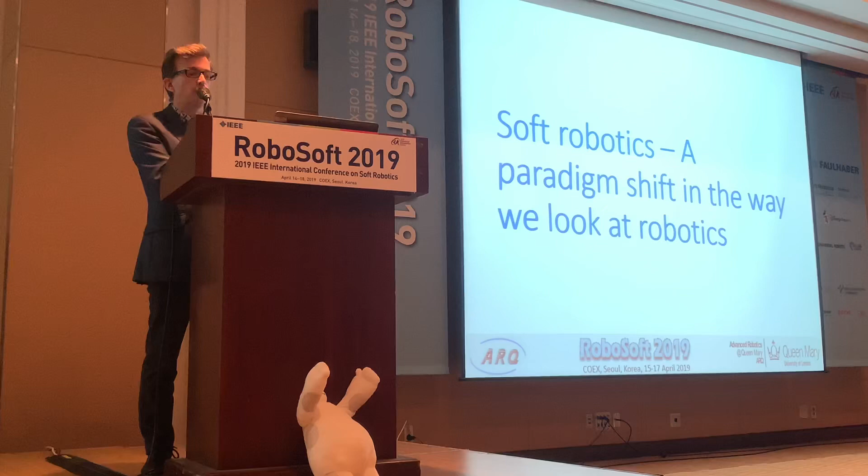Today I have been asked to look at how perception or sensing can be linked with this kind of new area of soft robotics. I want to give an overview, but it's difficult because at this conference I have seen so many sensing approaches. I suppose everyone here agrees that soft robotics represents a paradigm shift, and it really influences our way of looking at robotics.

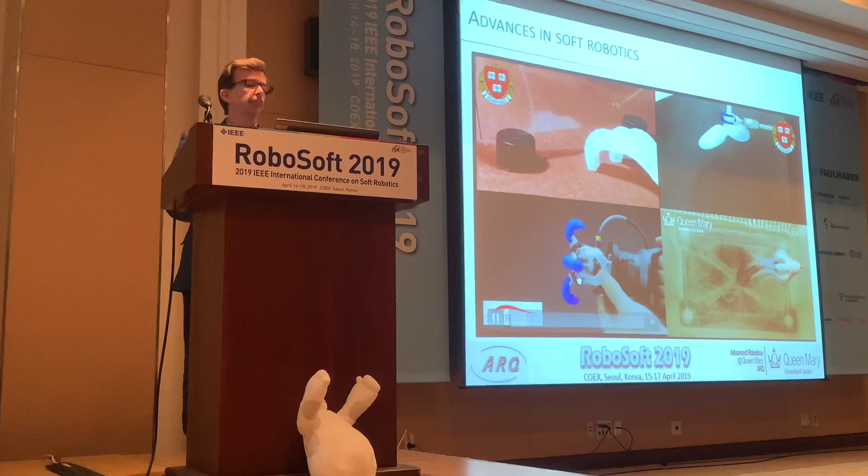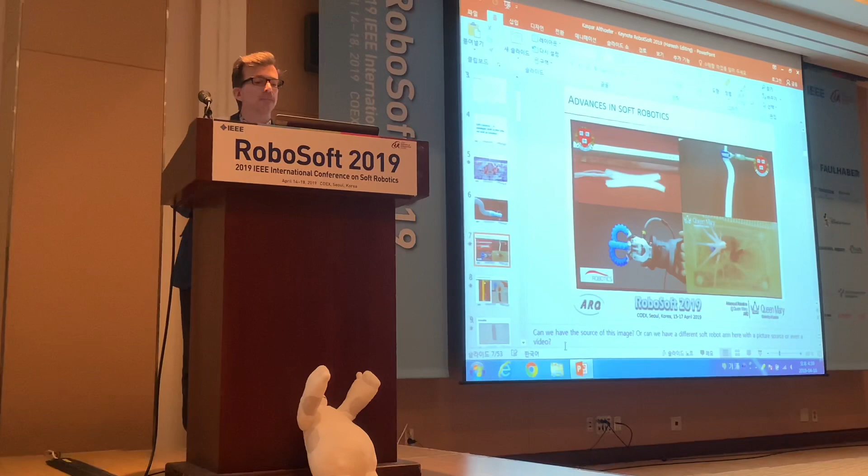So now the sound is in the way. I interrupted. I was told that's the only way to switch off the sound. Let's do that again. Okay, that's better.

Different systems are developing. We can see here examples from Harvard, from our place, even from a company, Soft Robotics, developing these systems. This shows to me there's a lot of interest in the area, and it's moving forward.

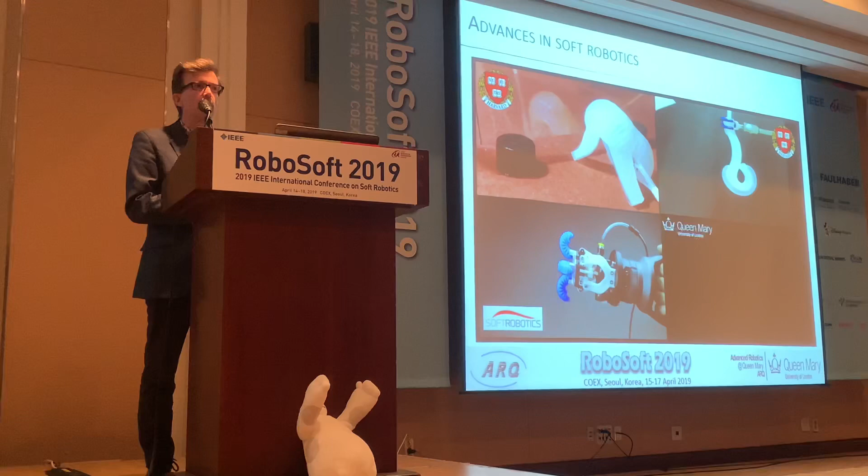However, these devices are so far very much at the beginning, and there is lots of development still needed. What I see is systems that show it works, that show we can create devices that can move. But I think we need to step a bit further and see whether we can equip those devices with the right perception so that they can also carry out meaningful tasks.

Here is another example, and I'm contradicting myself a bit. This was created in collaboration with colleagues from Poland, a research organization called PIAP. Here we have a soft robotic device made of silicone rubber material with chambers inside that can be inflated, and we have a gripper attached at the end that can carry out a task.

The interesting thing is there are no sensors in there, and still the system was running for many days without any problem. Obviously it was programmed to start with, but once programmed, it had the capability to generalize about its task and was able to pick up the ball even though it was not always arriving at the same point. But we need to see whether we can move forward to some more intelligent and autonomous systems, and those need something to perceive the environment so that they can carry out tasks.

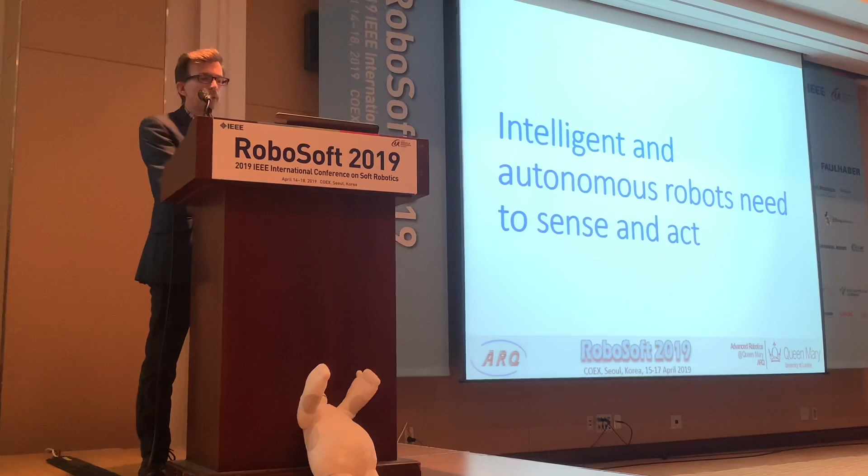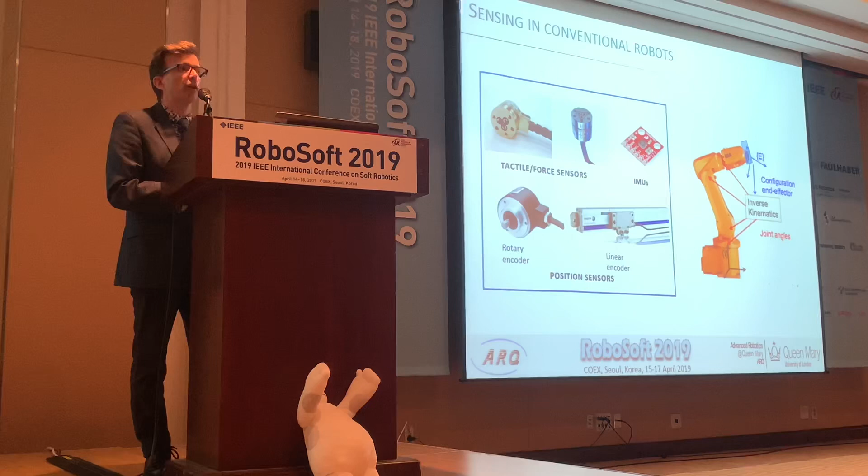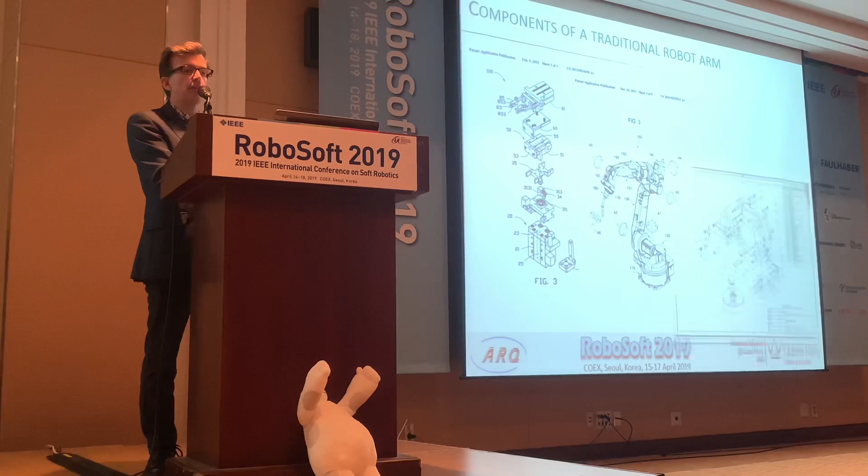So where have we been beforehand? Here is an example of a robotic manipulator, and we can see on the left-hand side the kind of sensors we're all used to, and they are all made of rigid components. It is very easy to equip a system that is already made of very rigid components, as we can see here, with those rigid type of sensors. You just screw them on and then off you go. However...

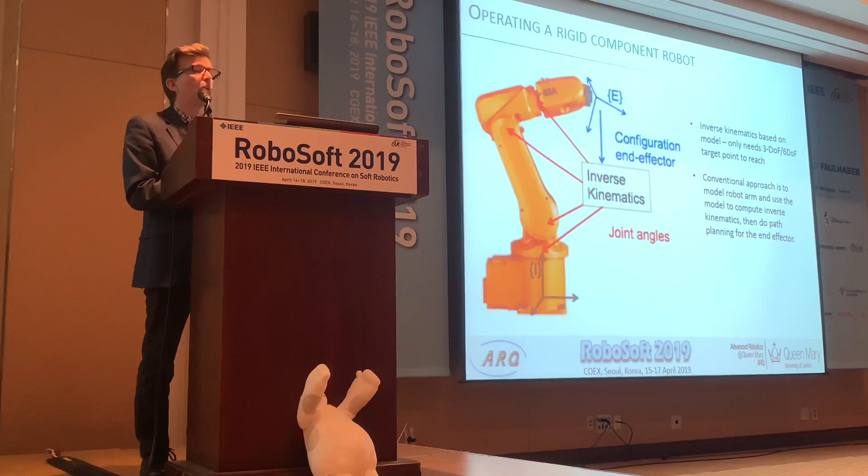The challenge will come if you look at the soft robotic systems. The approach taken so far in rigid component robots is to create an inverse kinematics model, and then you only need to specify points in space, and the rest is just a path planning problem. That is very straightforward, and here we can see it in a summary: we sense the environment, we do some calculation, and then we send commands to the actuators, and in most cases, if we have a rigid component robot, we will reach our target.

And I think that is neglected in rigid component robotics. So the models sometimes fail, and so maybe there is also for rigid component robotics a possibility to embrace that. Although on the other hand, we might think a big KUKA robot arm suddenly moving around in space to measure it might not be the best idea.

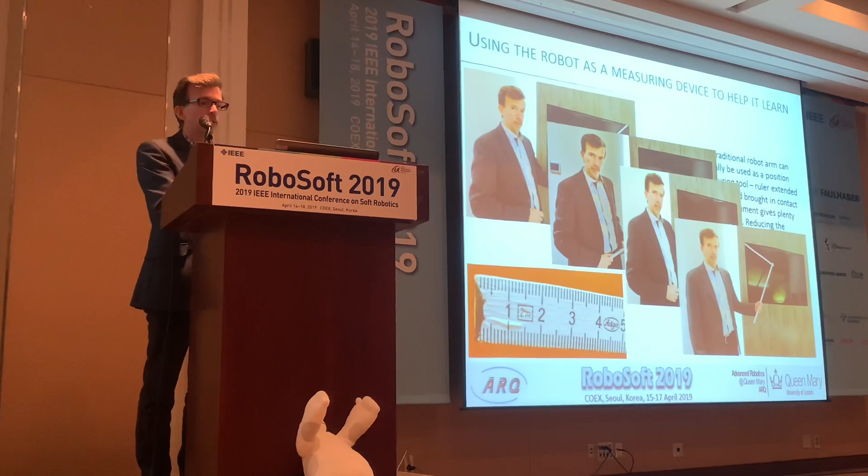However, I see there's a lot of potential for soft robotics. And as Daniela Rus also said at the end of her lecture, active exploration using sensors built into the soft robotic devices to understand the environment.

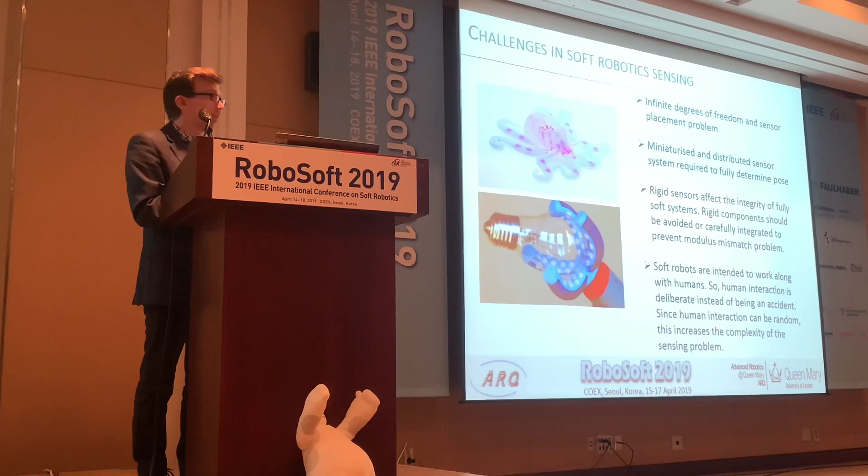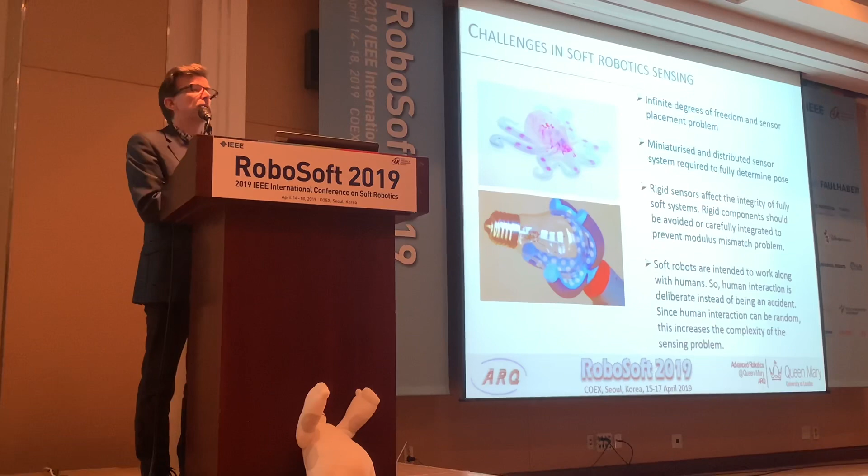However, what can we do now? If we have a soft robot, there are quite a number of challenges, because we have these flexible devices with their infinite degrees of freedom, and we have also quite a lot of sensor placement problems. We have seen the traditional sensors are not really made for soft robotics. We need to think about miniaturization. We have to distribute these sensors if we want to determine, for example, the pose of a soft robot. The rigid sensor should not impact too much on our soft robot.

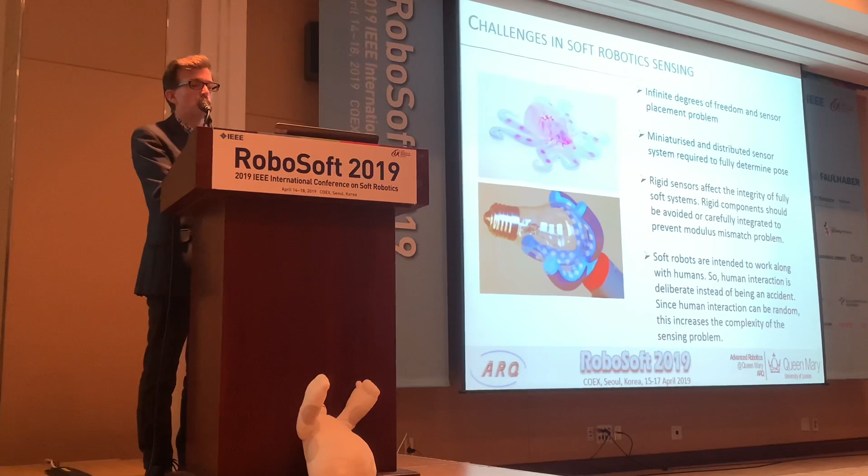And the last point, I think, is also becoming more and more important. I think there is more and more also an interest in bringing robots close to humans. And for this human-robot interaction, I think soft robots are ideal. So here is really an area we can move into, and these challenges have to be overcome to make meaningful robots to operate in complex and difficult environments.

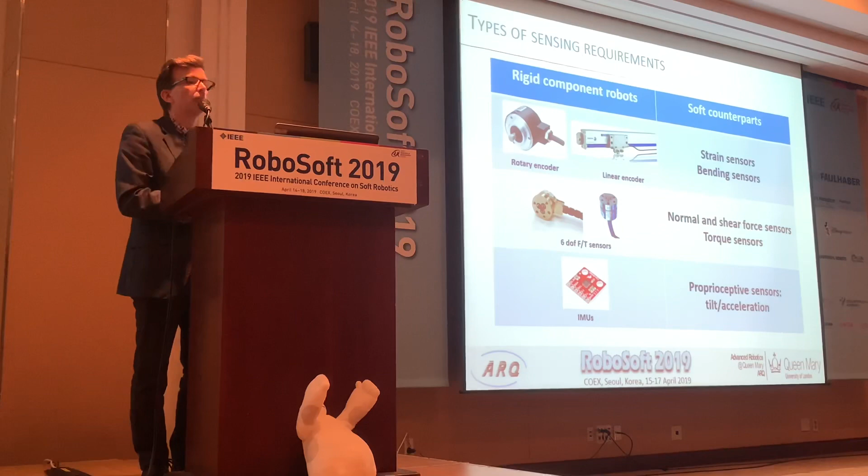So if you look at the different sensing requirements, on the one hand we have the rigid component robots and the sensors used in that area, and on the other hand we have the soft counterparts. So we are talking about strain sensors, bending sensors, torque sensors that have to be integrated, but also proprioceptive sensors that could be built into our soft robots.

So I tried very much to classify it a bit, but I think I failed miserably. So I have here an overview. Well, I think I'm missing quite a lot. I can only repeat - I saw many sensing technologies, sensing approaches presented during the conference, and there's definitely more. And if I don't mention yours, your work is also fantastic.

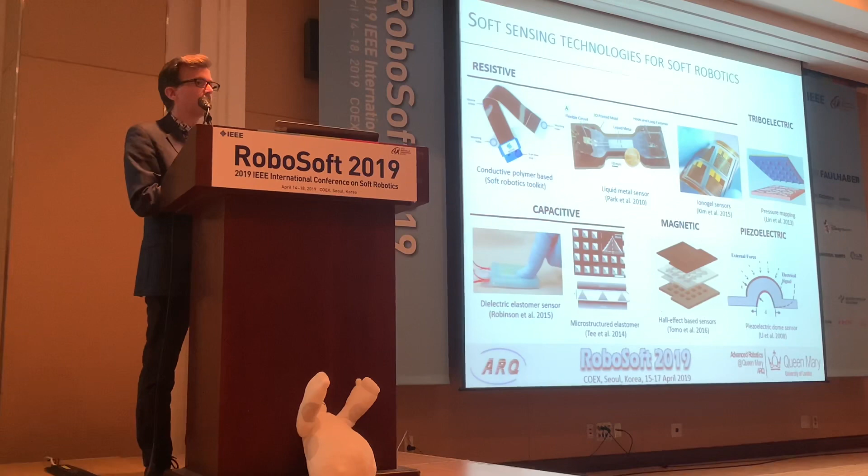Anyway, so we have resistive systems, flexible, stretchable devices that can be integrated without impacting too much on the softness of our robot. We have triboelectric systems. Capacitive is an area that has developed quite a bit. I've seen also magnetic systems and piezoelectric.

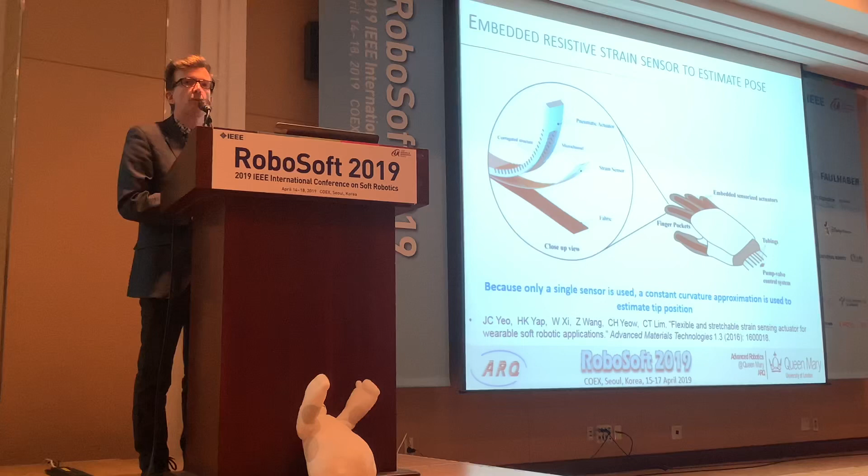So I'll go through some examples. We have embedded resistive strain sensors. These can be used to estimate pose. Here's an example by Yeo and others. We can see a flexible strain sensor embedded into the structure, and in this particular case it's just a single sensor signal that we get back. So we need some kind of model to relate the output to the movement of our robotic finger in this case.

I also would like to mention Oliver's work, Oliver Brock. He has already talked about it yesterday. So again, trying to come up with clever ideas on sensing information about the robotic device, this soft device, without impacting on this softness and this dexterity that is so inherent with them. So here we have a microphone and a sound generator integrated.

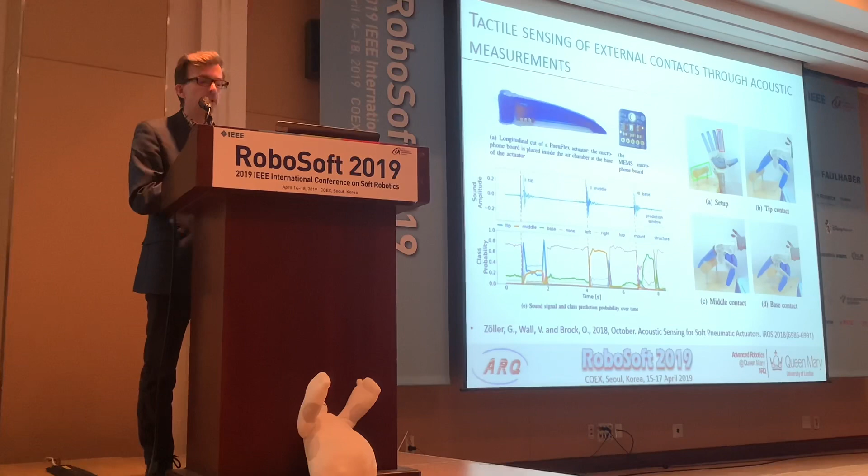And by doing that in a clever way and processing the data, I can actually identify where the finger is in contact with the environment.

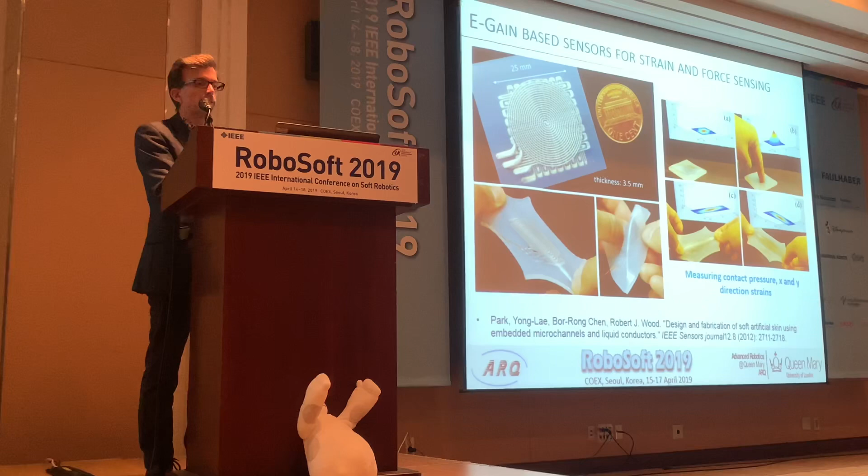E-gain-based sensors have been developed for quite some time now, and I would like to mention here Yong-Lae Park and Robert Wood working on that sensor. With this kind of material, we create sensors that are very thin, very flexible, and integratable into robotic devices.

One issue worth highlighting, which I haven't spent too much time on: position and force are very much coupled in these soft robotic devices. So it's not sufficient to just add sensors and start measuring. We also need software behind it to make sense of what we're measuring, and often it's difficult to distinguish between strain and forces. These are challenges we need to keep in mind.

I mentioned Stiff Flop earlier, so let me come back to show you some of the work we've been doing. We have been developing this soft robotic device. Usually I show an octopus in my presentation, but today I don't.

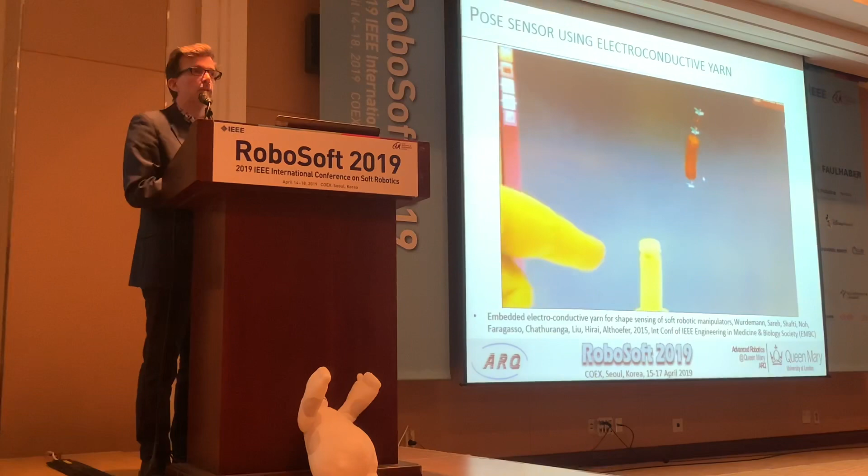We used an electroconductive yarn that was integrated here. Actually, we're using 3 of them, and by measuring how this yarn was changing its resistance, we could calculate in which direction our little robot finger was pointing.

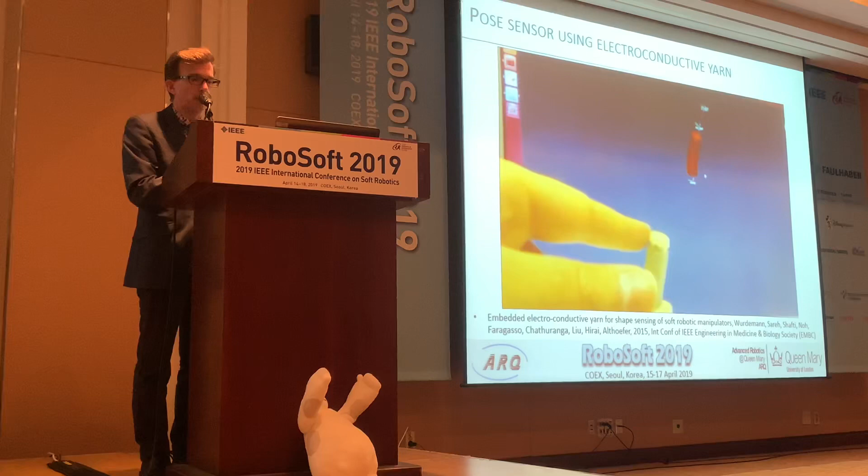We were also looking into developing force sensors for our Stiff Flop manipulator, and here you can see a system again based on fiber optic measurements. We have these sensing elements, deformable structures that allow us to measure forces along 3 axes.

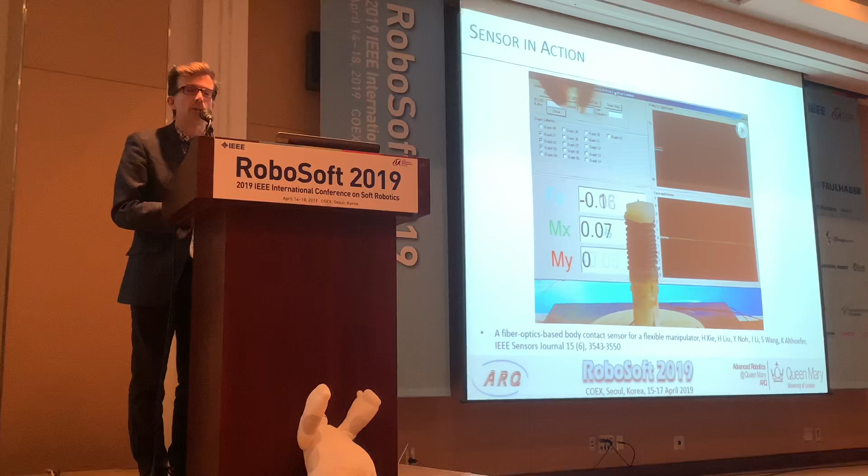They are rigid, so we try to avoid putting them at the tip; they sit here on the base. So the sensor is at the base, we apply our forces at the soft end and try to measure through the structure. Obviously that requires some modeling of that structure so we can make sense of the forces applied at the tip and then transferred through this soft system.

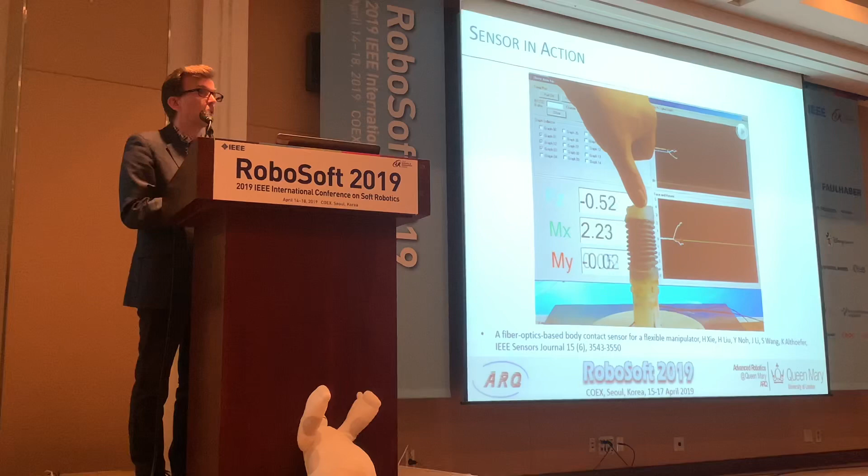I've seen very interesting work on morphological computation, for example, and lots of work has also been done on deep learning. I think there's a lot of potential there to improve the sensor output.

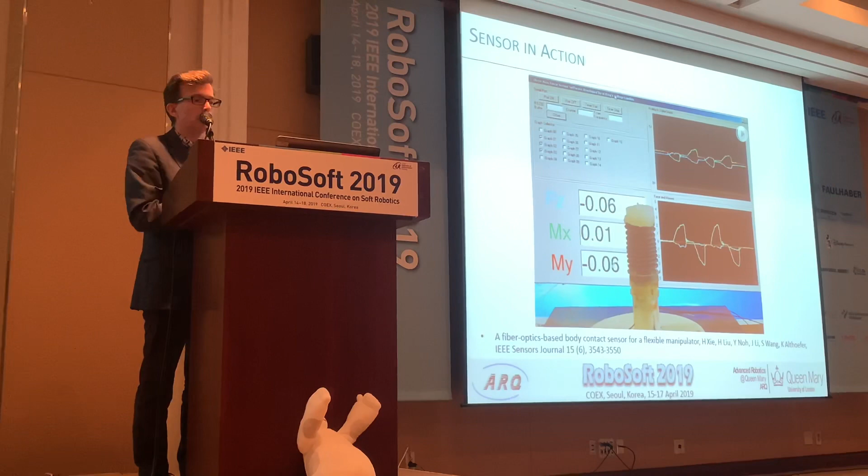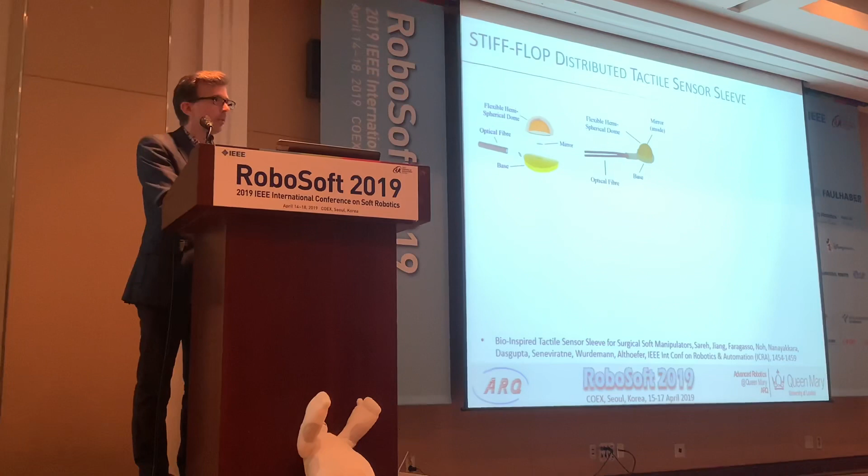We have also looked into tactile sensors, again trying to make use of the fiber optics technique we're using. You can see here 2 fibers shining into this dome-like structure, and when there is a force applied on the outside, we can measure that.

The interesting thing here was to try to be as compatible with the softness of our system as possible. These tactile elements were integrated in an elastic sleeve on top of our robotic device, and it did not impact the dexterity and softness of the system. It could still stretch and bend, as we can see here.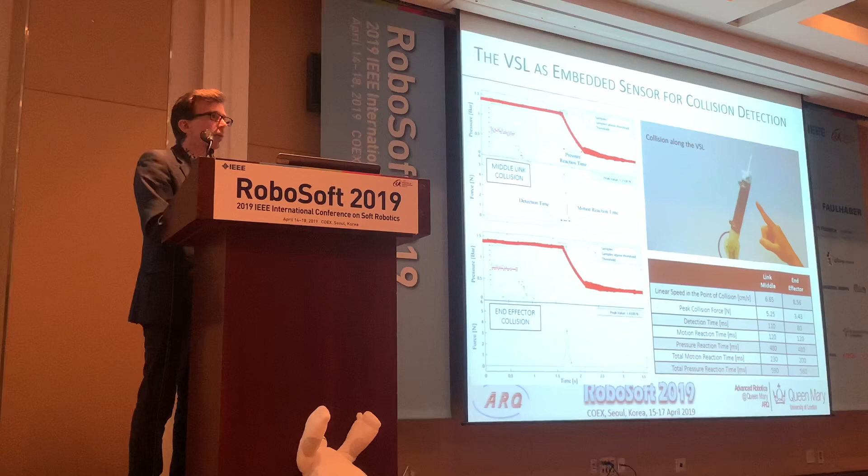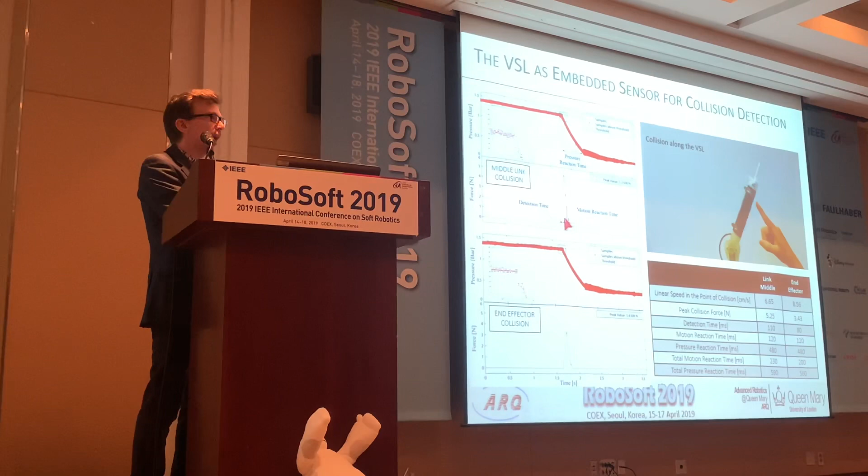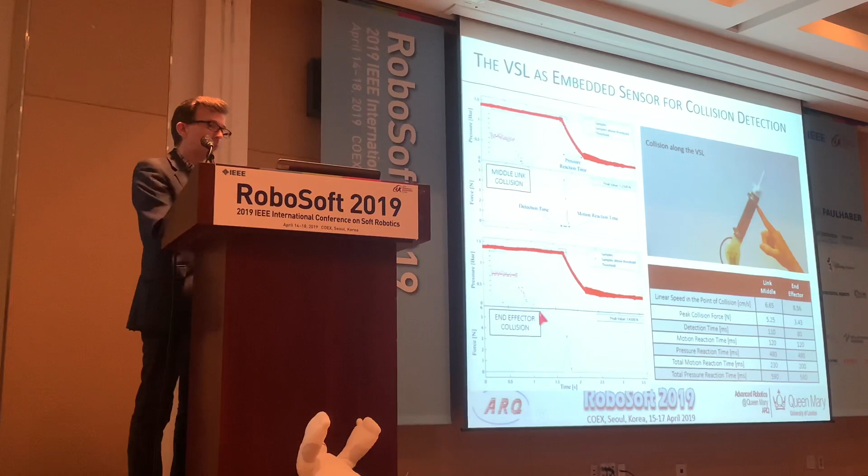We found that we already have a sensor built in, because we use a pressure regulator. The pressure sensor sitting at the base of this robotic device was needed to keep the pressure constant, but we could read a bit further—if you look closely, you see some spikes that are amplified, and these happen when there's a collision with the environment. We could distinguish between a collision more at the tip and more at the middle. Here you see the collision occur, we detect it, and we can move away from it.

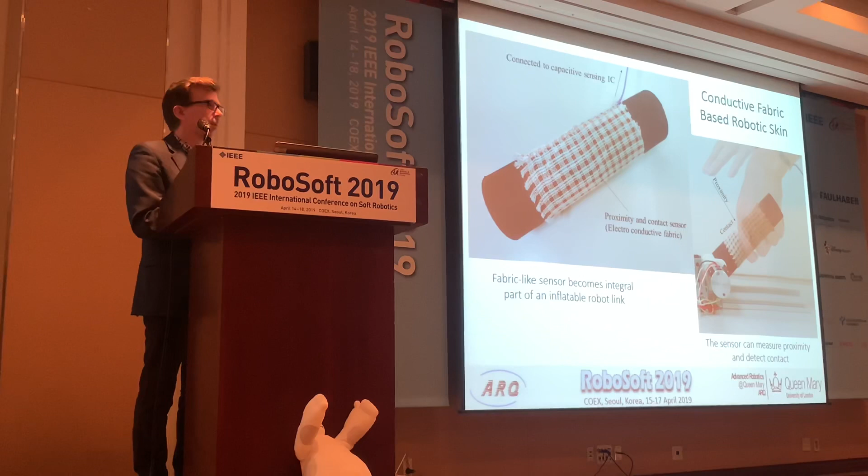Extending from this idea of a fabric-based link, we continued our work with Ritsumeikan University—our colleagues Shinichi Hirai and his team developed this conductive fabric-based robotic skin, which integrates very nicely into our fabric-based robotic device and can measure proximity to obstacles and contact. That will be published in a RAL paper and presented at ICRA in Montreal.

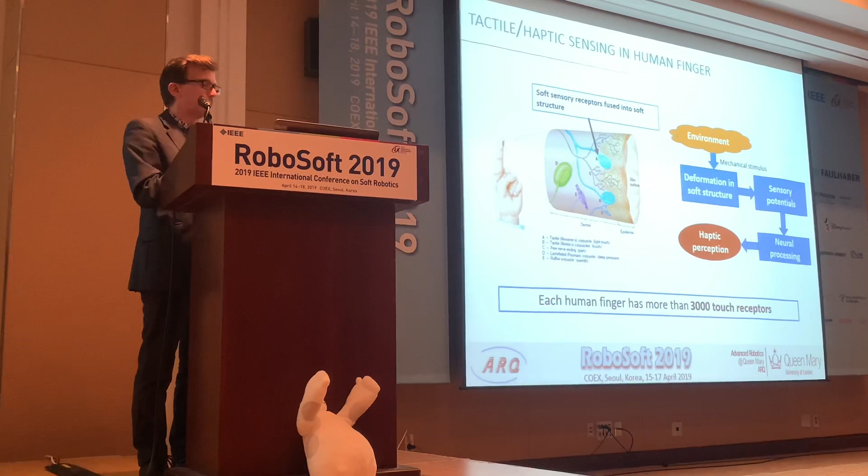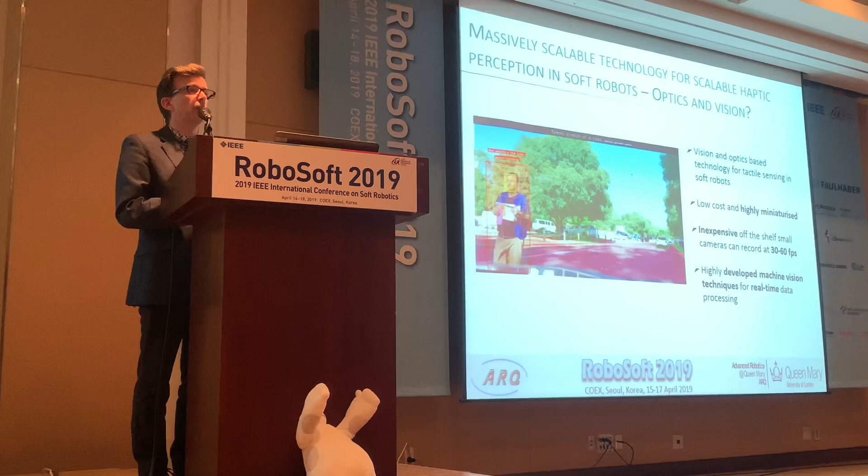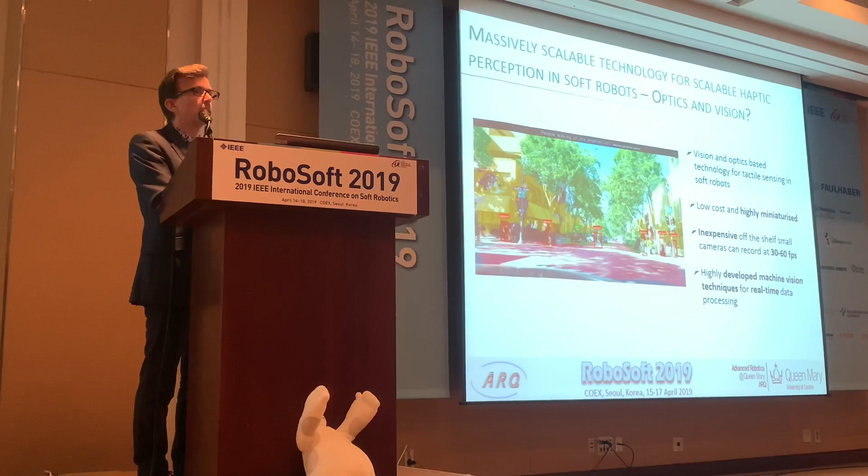I bring this up because I think vision is really happening and is already used in the robotics community. I think we should embrace it, even though I'm not really a fan of deep learning and deep neural networks—but I see it as something that's happening and working, so maybe it could be used as a tool in robotics, particularly soft robotics, to learn models of robotic structures. It could also be used as a sensor that's part of a tactile sensor, as we do at Queen Mary, where we integrate sensing structures based on flexible material—one of my PhD students presented it earlier today in the poster session.

We have a camera that observes pixels moving when contact occurs with the environment. In our case, we try to use just one vision sensor to measure not only tactile information but also force information. I should mention work happening at the Bristol Robotics Lab, the TacTip work, which operates on a similar principle.

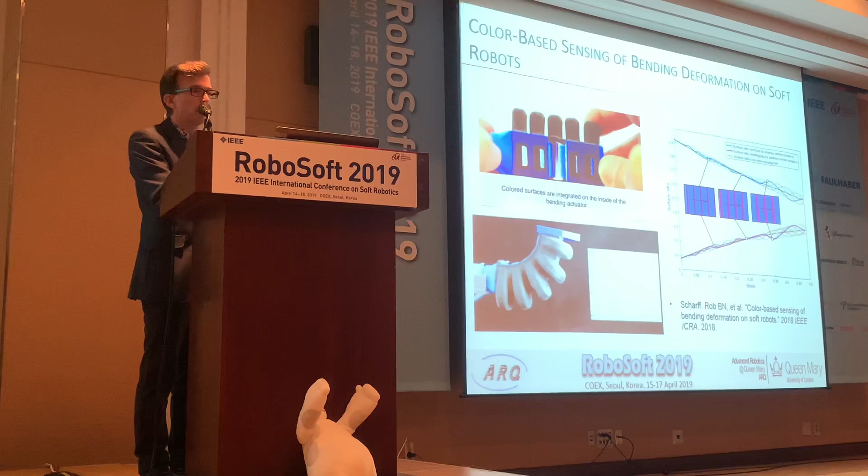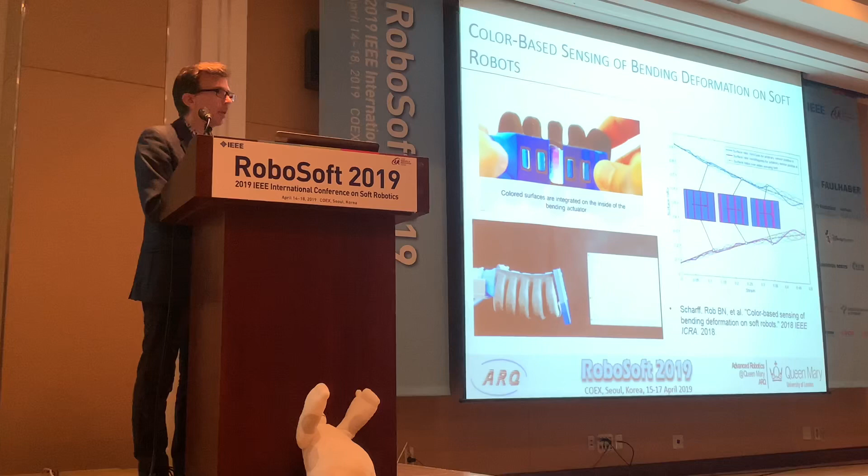I've also seen this system used to sense deformation. Here the system starts bending, and the color observed by a camera changes during the bending process, which can then be interpreted as the amount of bending occurring in this robotic finger or arm.

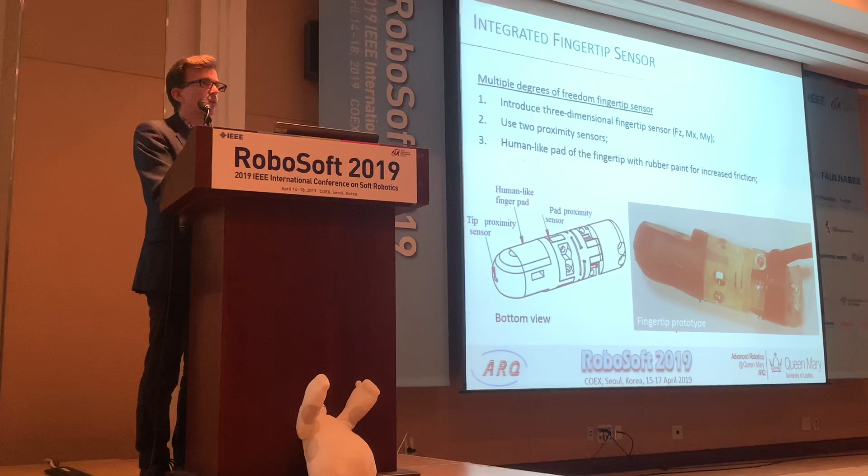Okay, I'll go quickly through a few applications of our optical fiber-based approach. We've done quite a lot in this area. We have integrated it with fingers of robotic hands, which are fairly rigid, but I think there is also a lot of scope to bring that technology to softer devices.

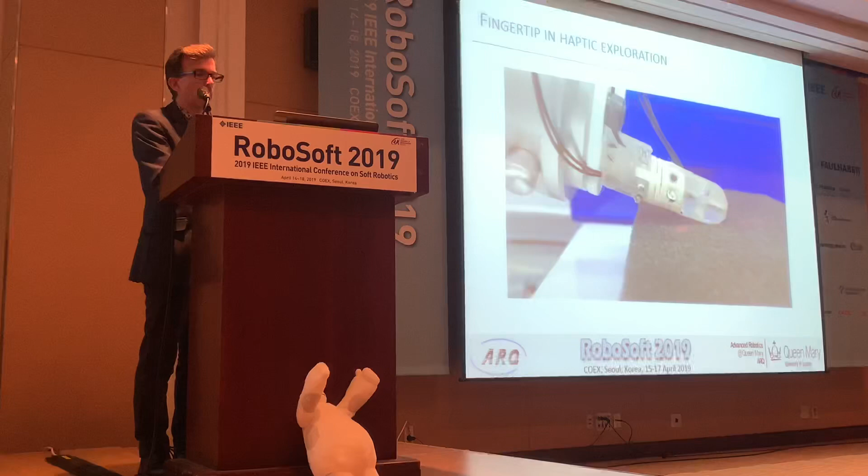We have extended this idea also to proximity sensing. I think that is very useful in any robotic device, but also for soft robotics. We can now measure the proximity to obstacles, and if we combine it in a clever way with the force sensors that are also integrated, we can even measure the stiffness of the objects that we are handling.

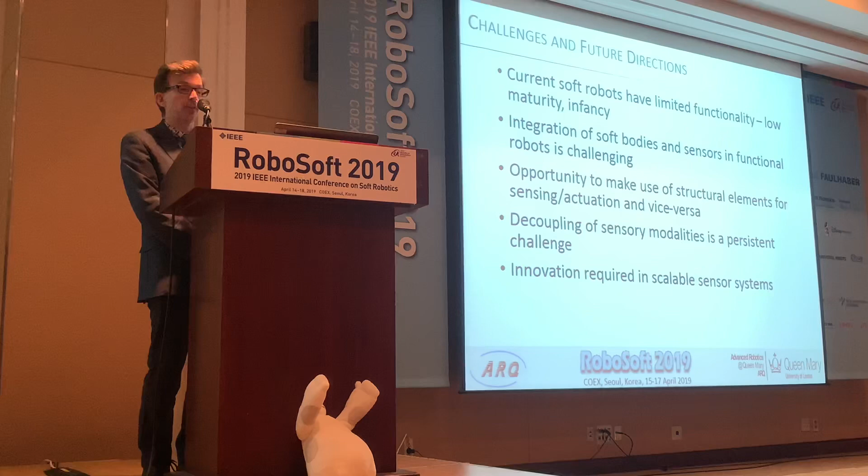Good, I'm coming to my conclusions. At the moment a lot of stuff is happening, and again I'm very grateful to be here and see all this fantastic work happening. But I think we are still at the beginning, and so much more will happen.

I think work should focus now on seeing how we can bring sensors on board, how we can integrate sensors into these soft robotic devices. It is happening already, but it's still very challenging, and more work needs to be done.

There's opportunity to make use of structural elements for sensing and actuation, and vice versa. The decoupling is definitely a challenge. If you look at force and pose estimation, scalable sensor systems are probably also needed.